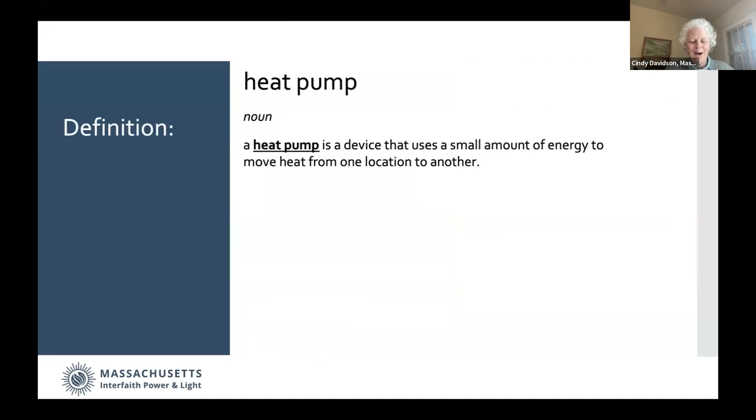What's a heat pump? It's a pump that moves heat from one location to another, and you already have some heat pumps in your home. Because heat pumps are reversible, they can either heat or cool your space, depending on the season, and they move heat more efficiently than creating heat.

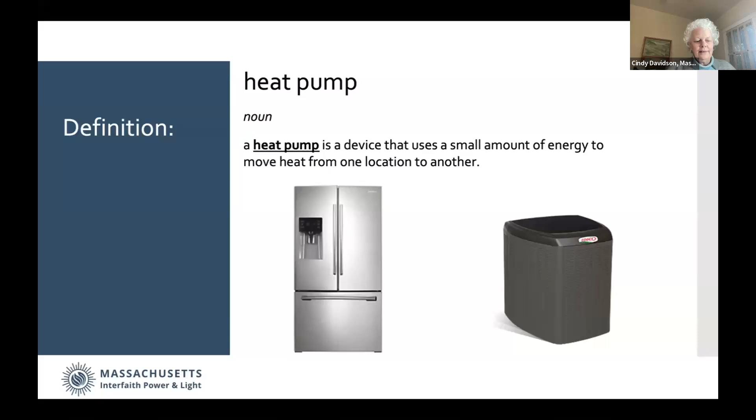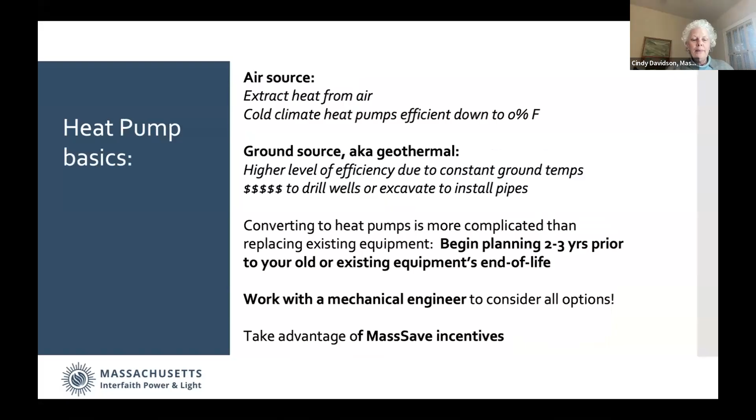As we hear from our presenters, keep in mind these important basics. You need to consider the pros and cons of air source versus ground source heat pumps in your context. Plan for ample time for a conversion to heat pumps. Do work with a mechanical engineer and keep abreast of MassSave incentives.

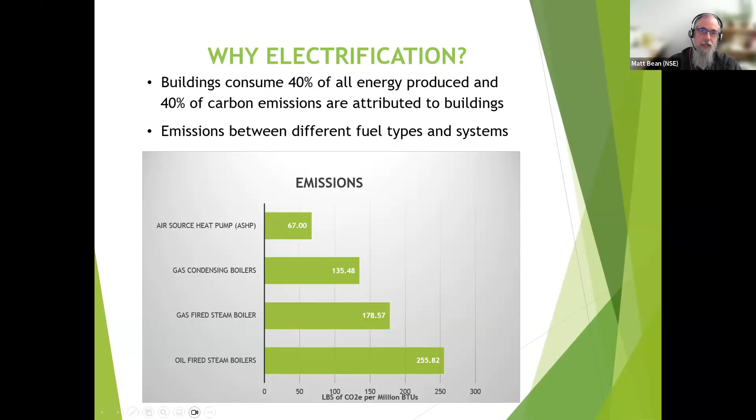So what are heat pumps? How do they work? Well, Cindy showed you the prime example - we all know heat pumps, the refrigerator is a heat pump. We've all used them, it really is no different.

I'm not going to go into the technology of how it really works, but the thing to understand is a heat pump doesn't generate heat - what it does is it's a system that moves heat from one location to another. And the beauty of the heat pump is that it can change that. In your refrigerator, you always move heat out of the refrigerator into the room. With a heat pump, you can go the other way as well, through a simple changing of some valves within the system.

So how have things changed? Heat pumps came to this area in the 70s and 80s, after the oil embargo and the energy crisis at that time period. One of the real issues they experienced was they didn't work very well at low temperatures. Many of the complaints were when it gets cold out, I can't heat my house, or it's blowing really low air temperatures. And that was really true - they got a bad name, rightfully so, but it really was an accurate representation of what was going on.

Now the technology's come a long way since the 70s and 80s. We now can run air source heat pumps down to negative 27 degrees, which is far colder than anything in at least the Massachusetts area sees. And you can get full 100% capacity down to -4 without a significant cost implication - first cost, installation cost implication, I should say. So that really means we can heat buildings with heat pumps with the newer technology, and the fears that can we really heat the building have really been solved.

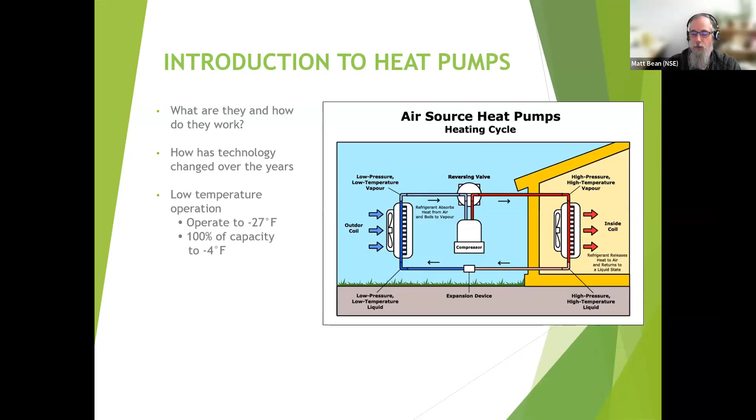So what are the primary types of heat pumps? One that is probably the most common when you come to building systems are air-to-air heat pumps, air source heat pumps. They go by varying different names, but really what it is you have an exterior heat pump unit, which is ground mounted or roof mounted, and then you have indoor fan coils, and you move heat between the outdoor unit and the indoor unit.

A second kind of heat pump that is starting to become more common in this area, but is kind of at the edge of this process—we're going to hear more about this over the next few years, is my anticipation—is an air-to-water heat pump. This is similar to the air-to-air heat pump I just talked about, but it has an outdoor unit that's very similar, except then you transfer the heat to hydronic water, and then you can distribute water like we have with baseboard and fan coils for years.

The current technology maxes out at about 130 degrees. That being said, the indications are that those temperatures are going to go up over time. I had a manufacturer from Europe in my office the other day. They make a 160-degree supply water temperature heat pump in Europe, and they're trying to decide whether to bring that to the US, which really will be a solution for systems that are currently based on hydronic gas heating.

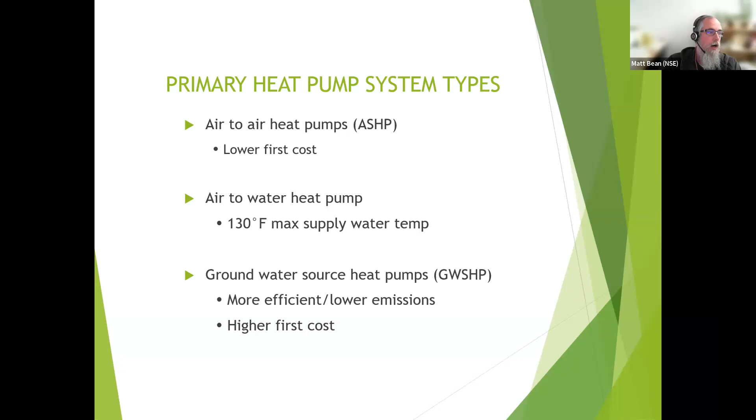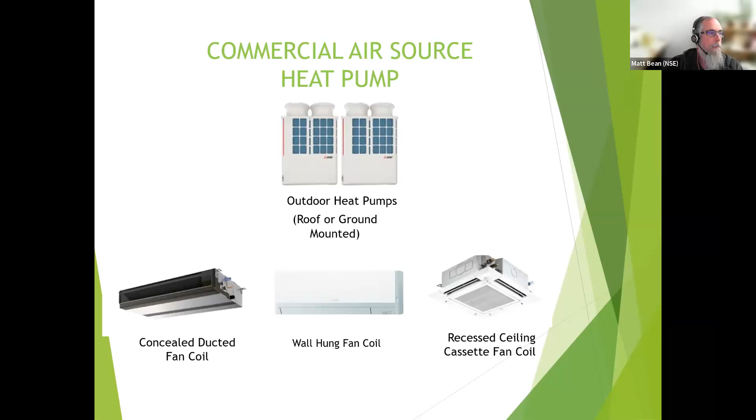So some parting thoughts and some things to think about—and Cindy said it before—starting planning early. Where we've seen teams really struggle is, my heating system has failed, what do I do? Unfortunately, that's really late to start the process, because all of a sudden you've limited your options and some of these things take time. So we encourage you, even if it's not going to happen right now, start the thinking, start contemplating how you might do this. So when you hit the point where you have failed heating systems, you're ready for how you want to address that.

If you're going to electrify your building, you likely need an electrical service upgrade. The vast majority of your buildings will. And that is important because, one, it's really expensive, and two, at least right now, supply chain and equipment issues are causing major issues. It could be a year before you can see the electrical equipment you need to put into your building. So if you ordered it tomorrow, you might not have the equipment for a year, and you need that before you can even start to think about heat pumps.

Understanding that and thinking about that early is important, because once your system's failed, if you call me today and say my system's failed, you may not be able to electrify the house of worship before the next heating season. It may just not be possible, regardless of if I can help you figure out how to do it. You just may not be able to get the equipment to achieve it.

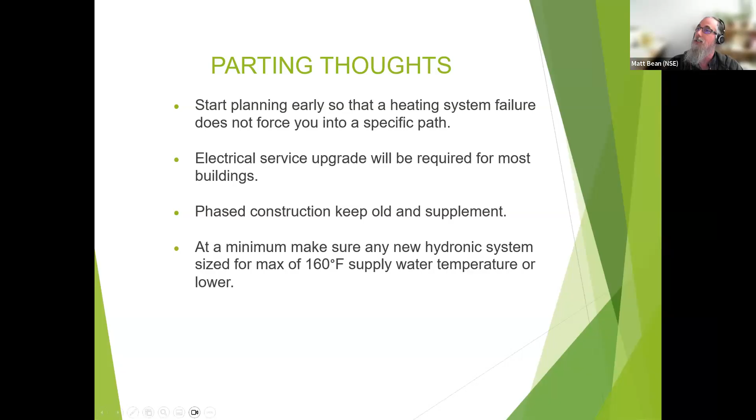So I can talk forever about this stuff, but I think that's about my 10 minutes. So I'm going to stop here and turn it over to Susan. And as soon as I can figure out how to stop sharing—there we go. Thank you very much for listening to me.

Thank you, Matt. Susan. Okay, I'm unmuted and I'm going to try to share my screen. Let's see if we can make this work. Excellent. Good. Okay, hang on. All right. Okay.

My name's Susan Adams and I'm head of the stewards at the West Concord Union Church. Stewards is our name for what many UCC churches call trustees. I am not head of this project by any means—the head of this project is in Sweden presenting on something else tonight. So you've got me. I'm using slides that we used at various congregational meetings to help us figure out how this went.

Impetus for our project was an old oil-fired steam heat boiler, just like everybody's been talking about. It was costing us a fortune to maintain. We had a lot of trouble finding a company who could repair the boiler well. We had fluctuating oil prices, and over many years of kicking the can down the road on this problem, we had done renovations where we'd added old air source heat pumps that were supplemented then by our steam boiler, just the way Matt was talking.

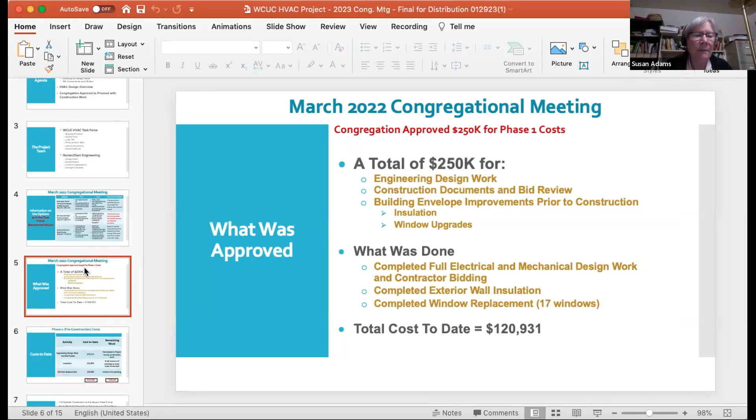These are our costs to date as of, I guess, March 2022.

Some of our design features that we've done: we upgraded our electrical service, and we made a choice to upgrade more than we would actually need for our heating system so that we could in the future put in an EV charging station. We're trying to look ahead to think about what we might want to do in the next project and not miss a chance to do good work.

We also made a choice to continue to use some of the fan coil and radiator stuff in the sanctuary that's left over from our old heating system, in order to preserve the aesthetic. We have beautiful woodwork in our sanctuary, and that choice probably cost us something like $40,000 to continue using that way of spreading heat. The water that flows through some of those fan coils is still heated by air source heat pumps, but it's hydronic baseboard heating, actually, and that was an aesthetic choice.

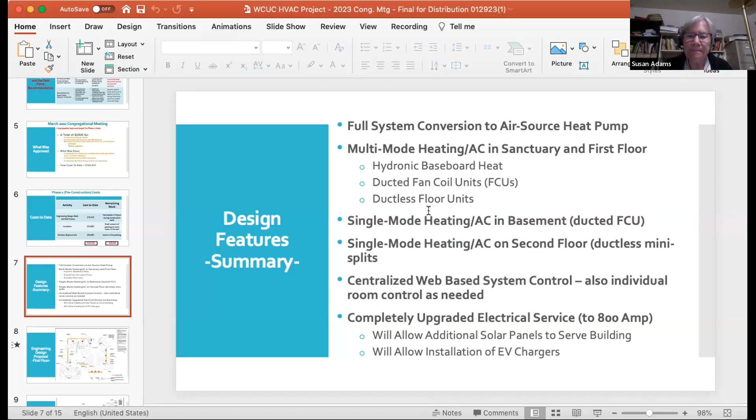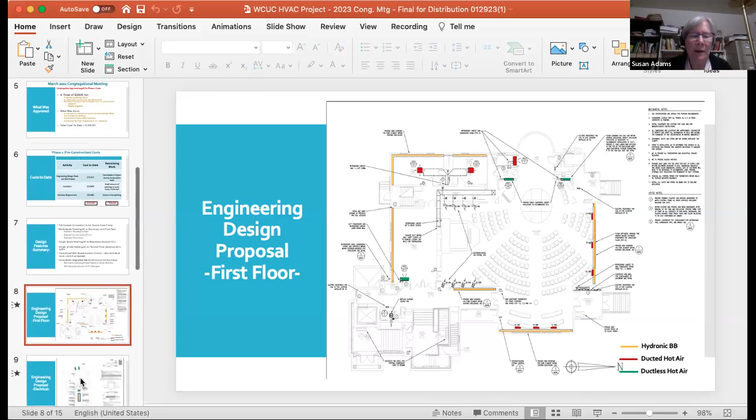The other 2 are wonderful firms, one a little larger than the other. One was kind of a one-man band plus workers he hired. The other has multiple projects going at once. We ended up going with the larger firm, thinking of COVID and what happens when one person gets sick, like the lead person, and suddenly you have no one to continue on. I think that influenced us a lot.

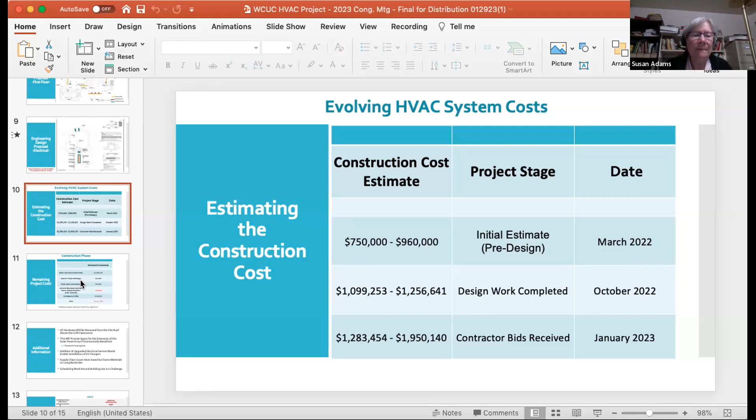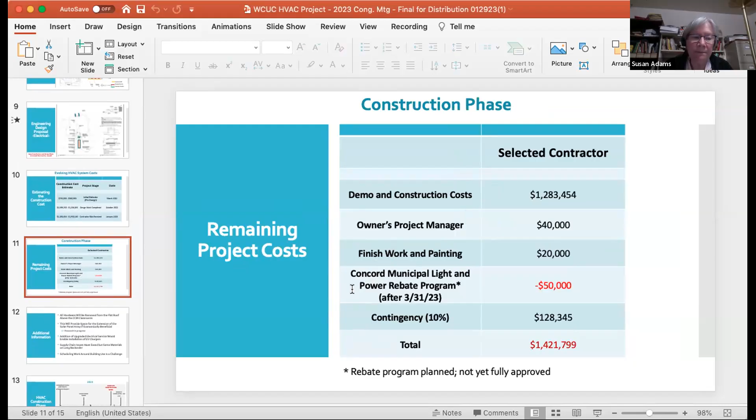Let's see, a little more information.

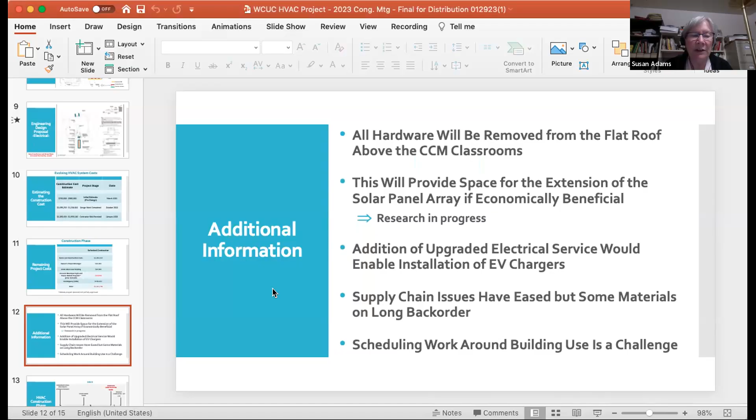There's the upgraded electrical service, which I think is one of the most interesting things we're hoping to do, to enable an EV charger in the long run. We've had to order equipment, and we're just praying it all comes in as quickly as we think it will.

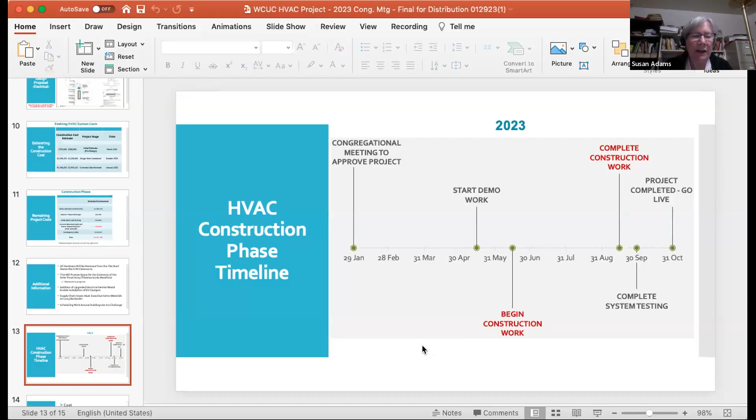Our biggest project challenge is cost. We had a big fundraising campaign that I could talk about, but won't right now. We applied for multiple grants, did not get any of them, and we may still manage to apply again.

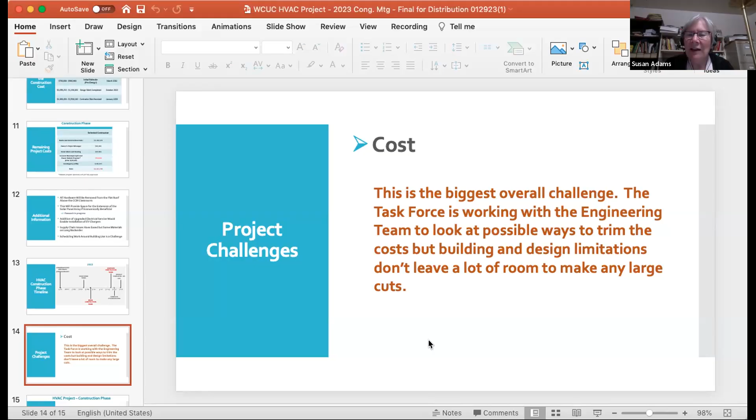I don't know if everyone on this Zoom got something today about the Department of Energy's grants available through the Inflation Reduction Act. They're pushing very much for groups of buildings working together—you may have been to a webinar about that, as I was. We're a little bit ahead of the timeline there, and we can't not do our project in order to wait to join a group. So that's been a bit of a disappointment, but anyway.

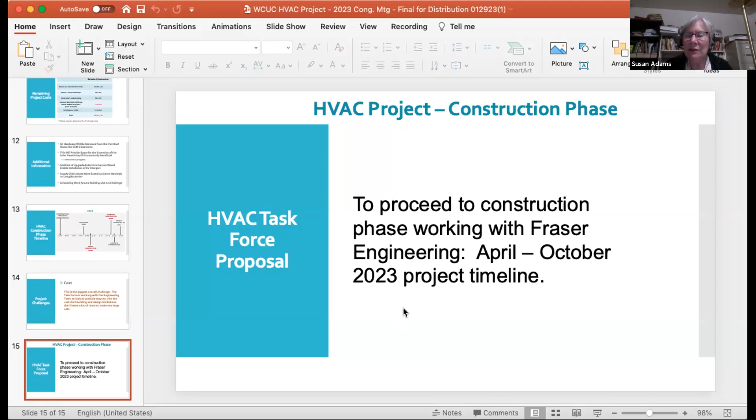So that's my last slide. We're proceeding with Fraser Engineering, and we hope to be done by the beginning of this heating season—October or November. Okay, I'll stop my share now.

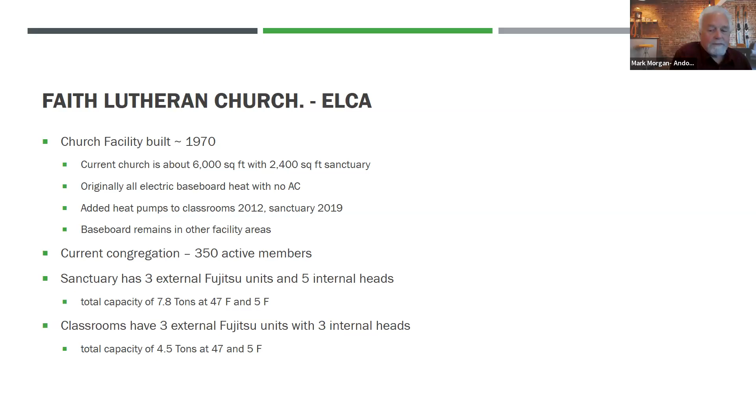If you're looking at a home with a 2,400 square foot footprint, 1 floor, you would likely get significantly less than 7.8 tons. But I think the reason for the design, I wasn't there for it, is the vaulted ceilings. It's a big volume. It's not just square footage, but the volume that's important for this situation.

As Matt described, these are called wall units. We have 5 of them. They're located all on top of the windows. They're pretty unobtrusive.

Maybe getting used to is that instead of using the electric baseboard, which has a certain feel to it, the heat pumps are blowing air. So there's different controls on how you blow the air in terms of direction and everything, which took some adjusting, because even if you have 70-degree air, if you blow it on top of somebody, it makes them feel cooler just from the wind chill factor, let's say, because your body is warmer than the air.

So just a little bit about the coronavirus. That's when I was the head of the group to determine what to do about the coronavirus. And we focused very quickly on air quality. It's the one thing that we could control in the church.

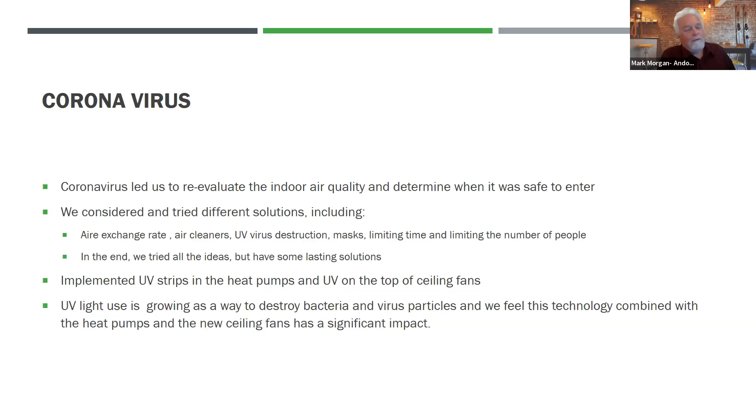So I don't know if that was the reason, but we really made it through in a pretty good way. So in terms of heat pump operation, what are we thinking about? I listed down 4 big things: comfort, safety, cost, and ownership.

So go down through comfort. If you work in a church and work with heating systems, it's impossible to please everybody. Somebody's going to be too cold, somebody's too hot, somebody will say their seat is in a bad place for the heating system. You have to work through that the best you can, with respect to everybody. But the key for our system was to minimize the temperature distribution in the sanctuary, top to bottom, side to side.

We had to look at where the fans from the heat pumps are blowing, where the ceiling fans are operating, and how and when. Also, how do you apply the heat? Do you turn it on 24/7, or just for the services? Because if you only turn it on for services, you're going to have a cold room that never really heats up, and you'll get more temperature distribution issues from the ceiling fans blowing. But if you heat the sanctuary 24/7 and only use it for 3 hours a week, there's a question about how effective that is too.

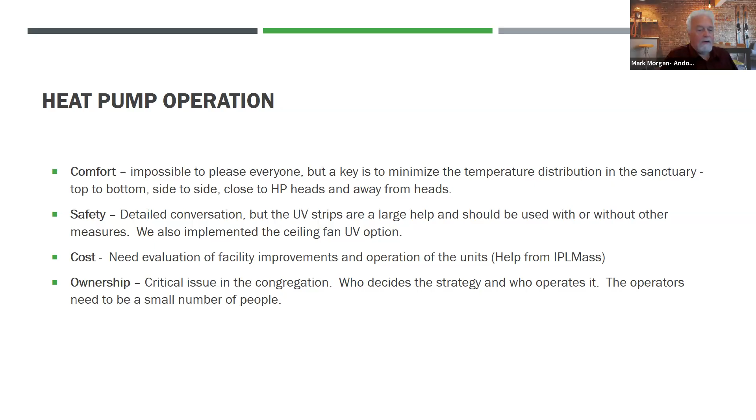And again, we haven't really evaluated the cost. When we first started, it was all about safety, then we had to figure out how to make it comfortable, and now I guess we're going to talk about cost more as we go forward. In the summer, we just turn it on to 72 on Sunday morning.

What I found with the heat pumps, at least in my house, is the cooling system works really quickly and well. The heating system works great too, but it takes a little more time to get everything up to temperature. I think it's just because of the temperature difference - when it's 10 or 30 degrees outside and you're trying to get up to 70, it's different than if it's 80 or 90 outside and you're trying to get down to 70.

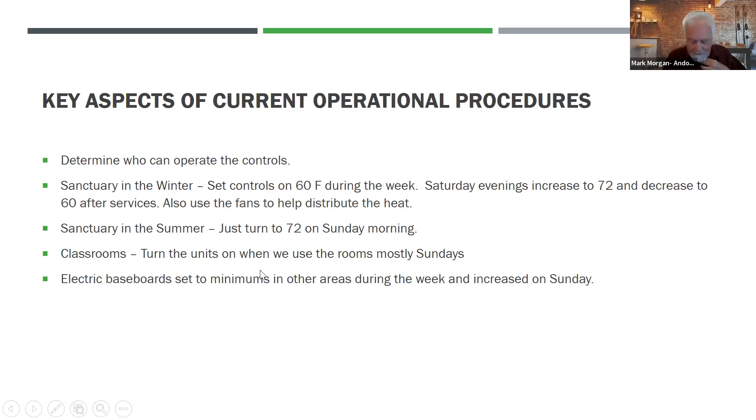In conclusion, we're happy with the heat pump systems in terms of air comfort and air quality. It took work to understand how to control them, and patience for our congregation as we learned, and they can be used to improve air quality. And we're now trying to look at how we can improve the energy costs and use.

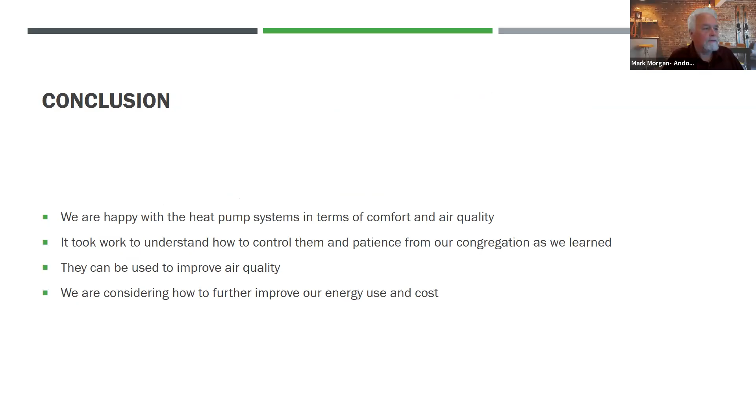So, sorry about that, Bill. I was trying to keep time. Okay. Thank you, thank you.

So at this point, I'd like to move to the questions. We've gotten a lot, and I imagine we'll have more as they come in. I'd like to take them more or less in the order that they came. So the first one: a person commented that houses of worship are used a lot on Sundays, or your worship day if it's not a Sunday, and wondering, does the uneven daily use cause a problem for ground source heat pumps, or maybe air source heat pumps? I think that might be a question for Matt.

So the short answer is no. Ground source heat pumps are really about yearly balance, making sure that you're taking out of and putting back into the wells an equal amount over the course of a year. But all of these systems can do okay as far as only being used for a day or two a week and then being very marginally used the rest of the time. There are some design considerations to think about in sizing and choosing equipment, but generally, no, that shouldn't be a problem.

Thank you. We had another question, actually a couple of questions, having to do with getting money, rebates, and incentives from either state or federal government grants. Jim, I think you have a lot of knowledge on that. Are you available to answer a question on that?